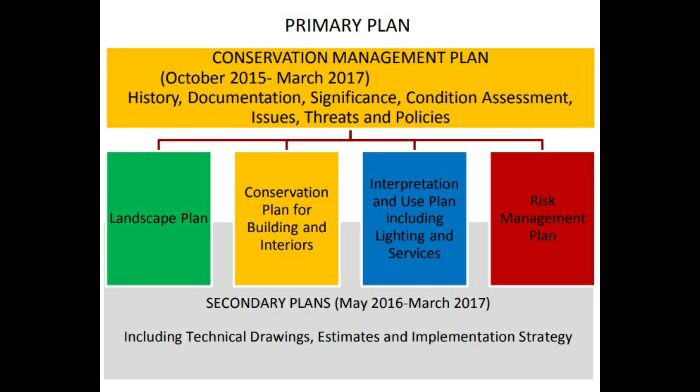Gandhi Bhavan has been funded twice under the Keeping It Modern grant of the Getty Foundation, for its conservation management plan from 2015-17 and implementation works from 2020 to 2022.

Gandhi Bhavan is a testimony to the culmination of modernism as an aesthetic, historic, and intercultural movement in India. Its conservation seeks not only to address its cultural, historic, and aesthetic significance, but also serves as a resource for the future conservation discourse for modern heritage in India, integrating new technologies and approaches with established protocols and standards.

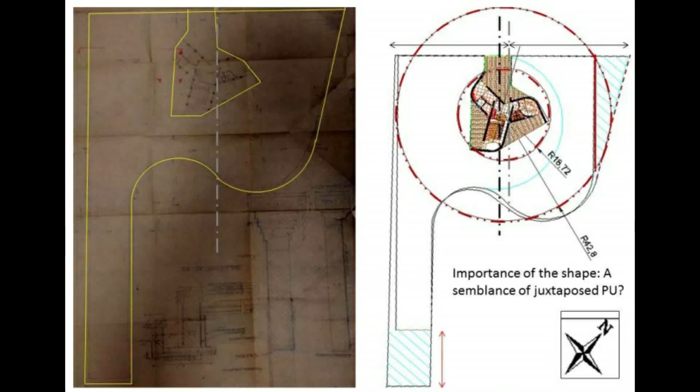The Conservation Management Plan is based on extensive background research, testing of materials, and technical analysis by the multidisciplinary team comprising a range of experts and organizations such as DRONAH and IIT Madras. The plan preparation also aimed to build lasting capacity by supporting training workshops for experts of modernism in India as well as for local professionals in the region.

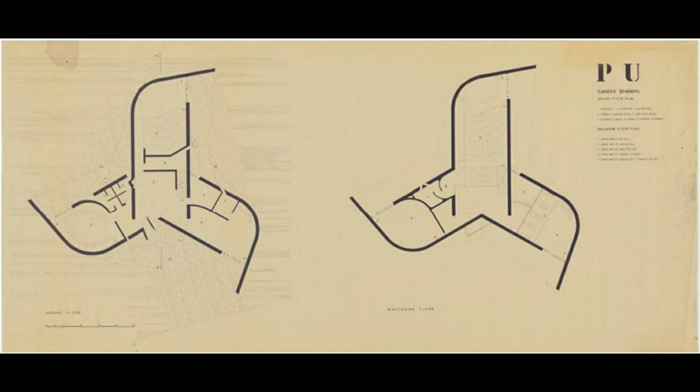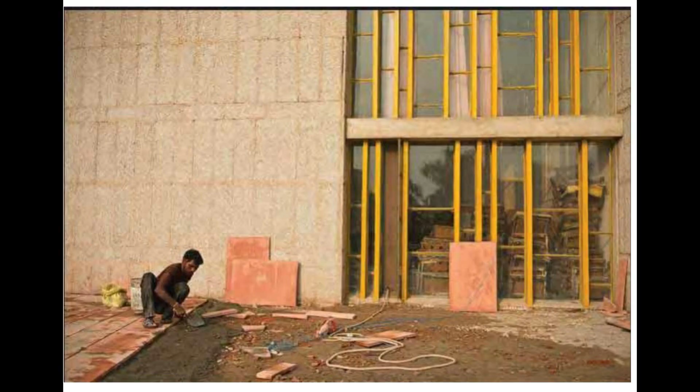The first phase of the work plan largely comprised historical and archival research along with documentation of the building. The team worked on tracing the history of repairs and alterations done till date, including oral history recordings of architects, draftsmen, and engineers who had worked with Jeanneret.

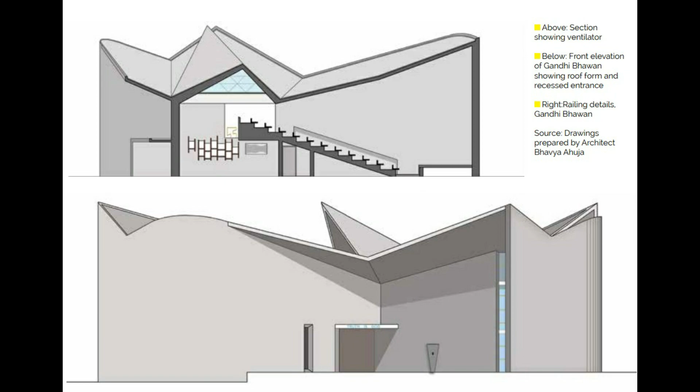3D laser scanning was also used to generate high precision as-built drawings and a virtual model of the building. A detailed condition assessment was carried out by the conservation architects, material experts, and structural engineers using techniques like visual and mechanical surveys, ground penetrating radar, and thermal imaging.

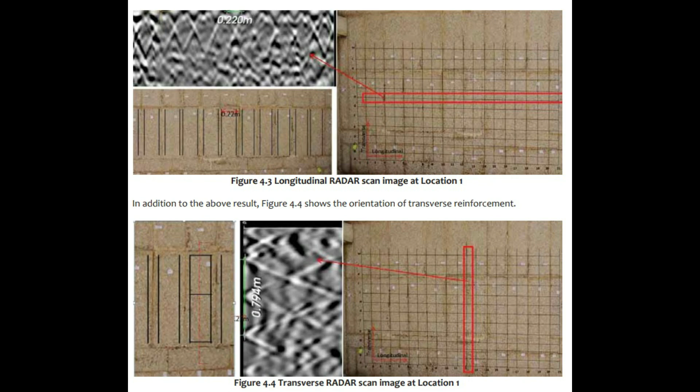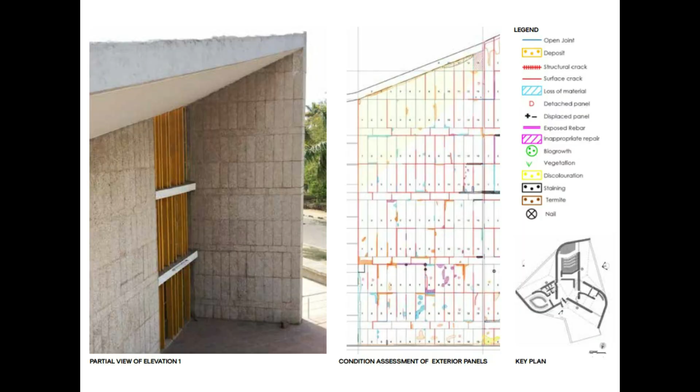The scientific testing involved sampling of various materials for strength, composition, mechanical, and physical behavior. The exterior facade comprises 3600 concrete grit panels clad to the walls, which were visually and mechanically assessed for issues like cracks, loss of material, discoloration, deposits, repairs, and detachment.

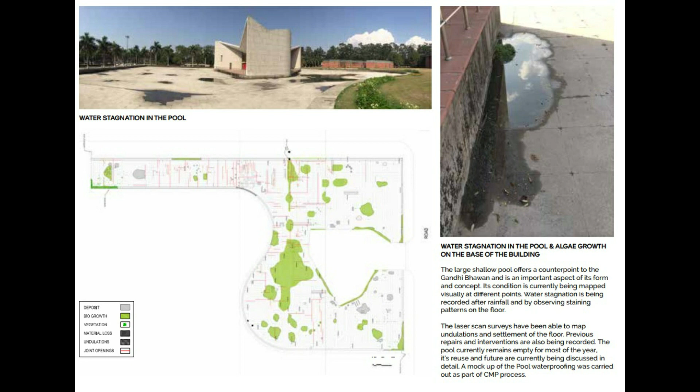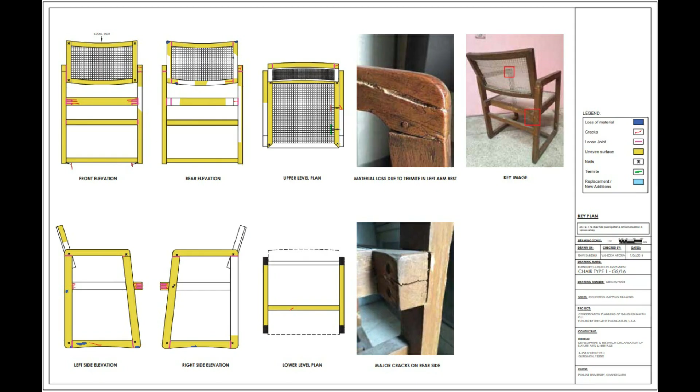The condition of the surrounding reflective pool and its significant role in passive cooling was also recorded in detail, including core testing for seepage issues. The work also involved mapping and assessment of the interior finishes and the movable furniture designed by Jeanneret himself.

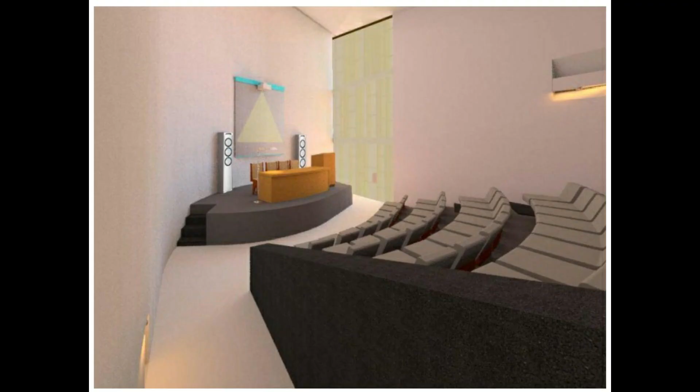With discussions and consultation from experts and stakeholders, the policies and implementation program were finalized, including building use, interpretation, retrofitting as per modern needs, and conservation works to ensure long-term maintenance of the building.

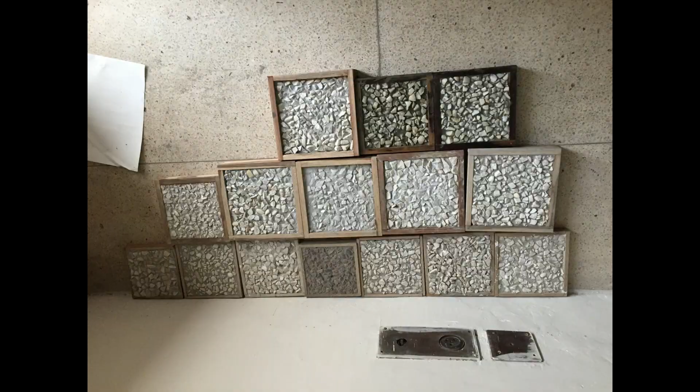This involved mock-ups like rebuilding of concrete grit wash panels to match the original, making of terrazzo flooring samples in similar grain and color, installation of acoustic panels in the auditorium ceiling, and waterproofing of a small section of the water body to address the seepage issue of the pool base.

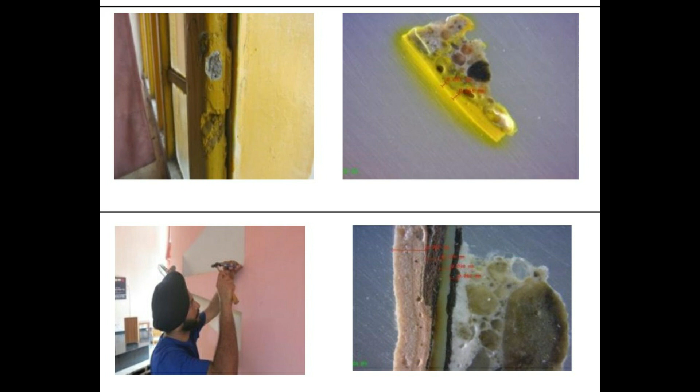The entire conservation lab was also involved in testing the paint pigments and wood samples from the furniture, as well as conservation of the original archival drawings of Gandhi Bhawan housed in the University Architecture Department.

The entire process of the project has been recorded in a book published by MAPIN and Panjab University with the support of Getty Foundation.

It was a great learning experience for me as the resident architect at Chandigarh, working with multiple experts and coordinating various facets of the project.

The support and commitment of Panjab University, from the level of Vice Chancellor and Registrar to the Chairperson of Gandhian Studies, Dr. Manish Sharma, is commendable.

I am now looking forward to the implementation of conservation works of the pool and the exterior panels as we proceed further with the implementation grant given by Getty Foundation.